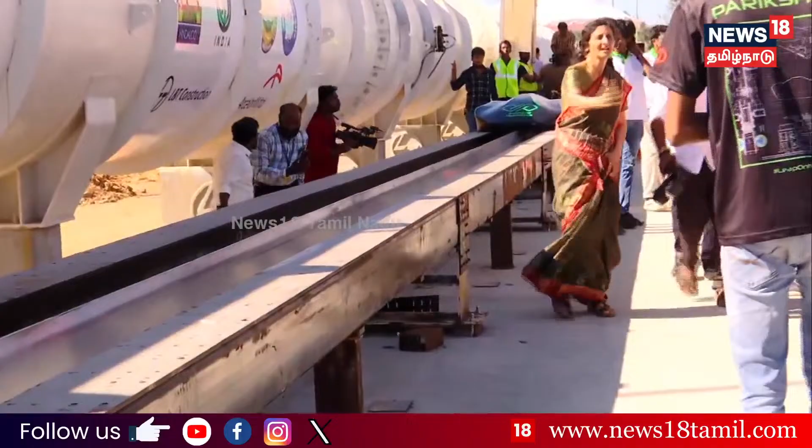Yadav ji, Minister is going to see us.

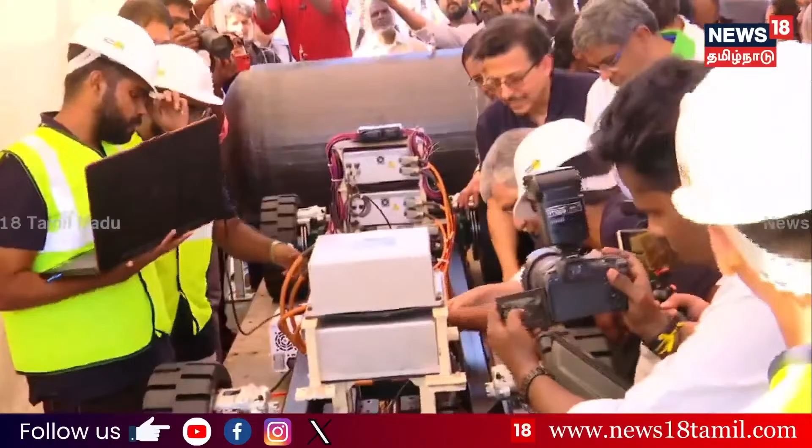So this is the linear induction motor, that is the electromagnet. That is for the vertical. And that is for CO2 removal and O2 generation.

Next is our most efficient propulsion system yet, which uses a yet-to-be-patented technology incorporating two motors into one. Third is the low pressure boiler. For thermal injection we can't use traditional methods since there is a vacuum inside, so we use the low pressure environment present in the tube to inject heat. Last is our integrated power electronics, where we can claim we have created the largest power electronics PCB yet to be made in IIT Madras.

Thank you. Now looking at the long-term goals, having built and designed the 422 meter tube, we realize there is yet more to infrastructure. By reducing the cost, we can further scale up the infrastructure, so we found three ways to do this.

First is air locks, wherein we isolate a section of the tube and pressurize and depressurize only that section. The time required and the energy used is less, hence it reduces the total cost. We have also filed a patent for this.

Second is the material of the tube. Currently we have a steel tube, and we are going to move to a concrete tube, which will further reduce the cost by 81%.

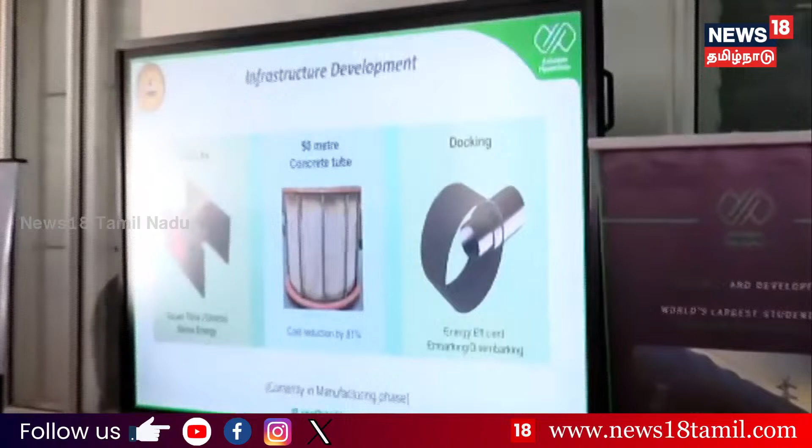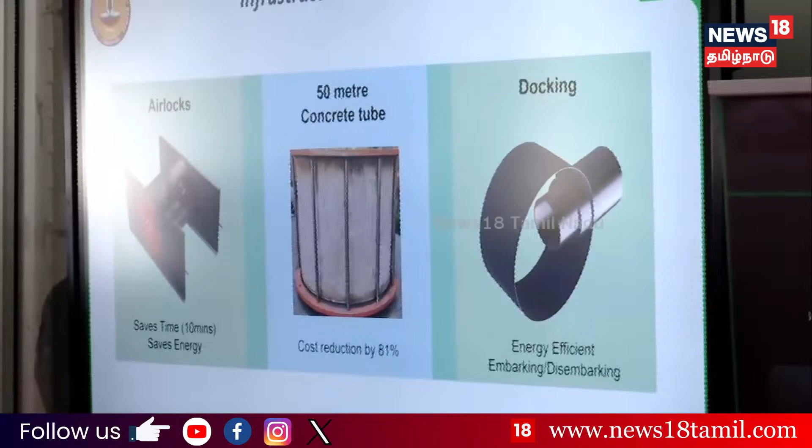Next is docking, which will help us embark and disembark passengers from the pod outside of the station, reducing the energy required and time, making it more energy efficient. One special development we are working on is the real life mock-up cabin, which will help people gain a real life immersive experience of how Hyperloop travel would look like.

We proudly announce that we participated in India's first global Hyperloop competition, GHC, in February, and we demonstrated our pod 6.0. This year we will also be participating in European Hyperloop Week, held in Groningen, where we plan to demonstrate our pod 8.0.

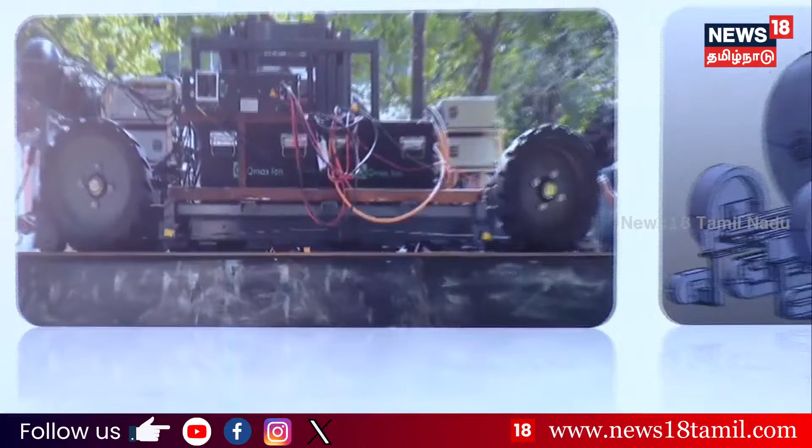We have developed three generations of the pod. In the first generation, we showed linear propulsion, using an Ashok Leyland dost chassis modified for our use case. But we faced a lot of issues when we took other chassis designs for other purposes, so we made a ground-up design and created our own chassis. This is Gen 1, a skateboard chassis which brings the CG down, so during dynamic levitation we will have less load transfer.

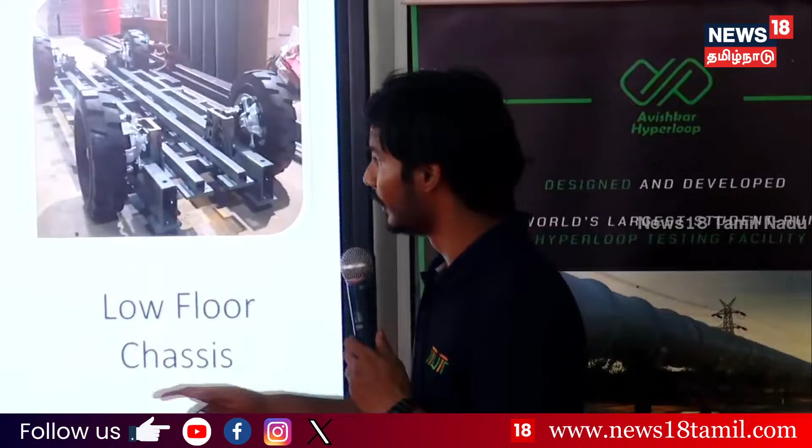We have now made Gen 2 of the pod, which we use for levitation. This will have vacuum operation along with magnetic levitation. All subsystems are designed for full scale, acting as a payload, and we have made it modular so that replacing parts is easy - just remove the bolt and add it from the bottom. We have brought the floor very low so the CG height is very low, and we have a top hat which we use during non-vacuum applications to reduce drag.

We got inspired by the Falcon - Garuda is the Indian name for Falcon, which is why we named the pod Garuda Vahan. We had help from ANSYS in doing simulations and were able to reduce the drag by a good amount. We also took Ashok Leyland's design studio help to come up with the front fascia for our top hat, along with Katya's help in shaping it.

We are currently using steel wheels and solid rubber tires in order to have lesser deflection during full load.

We are now working on a lateral gear, and we are also making the pod compatible for operation in vacuum.

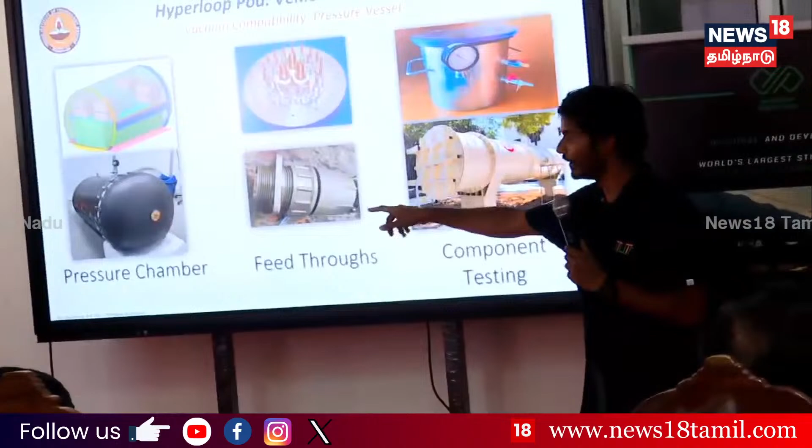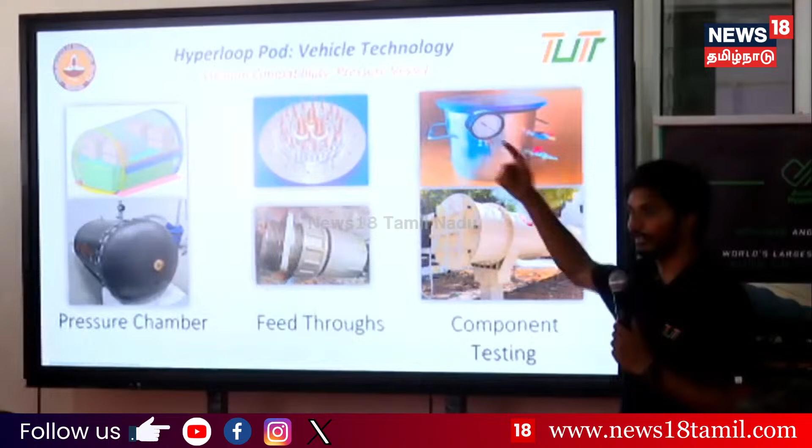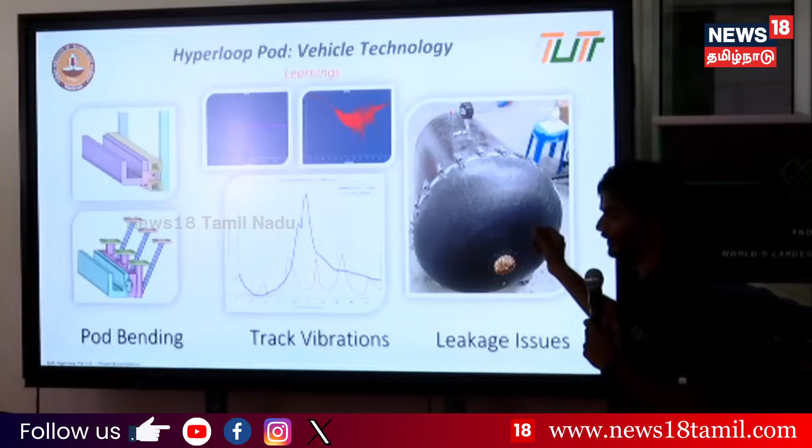So we had a lot of learnings from this journey of more than 2 years. We had track vibrations, so we used the TMD to reduce the track vibration, which was successful in reducing the amplitude, but still it was not up to the level the control system wanted. We are actually finding ways in which we can reduce the amplitude more. And the pressure chamber currently is having small leaks, which we will fix in the next few weeks, and then we will be able to show this operation.

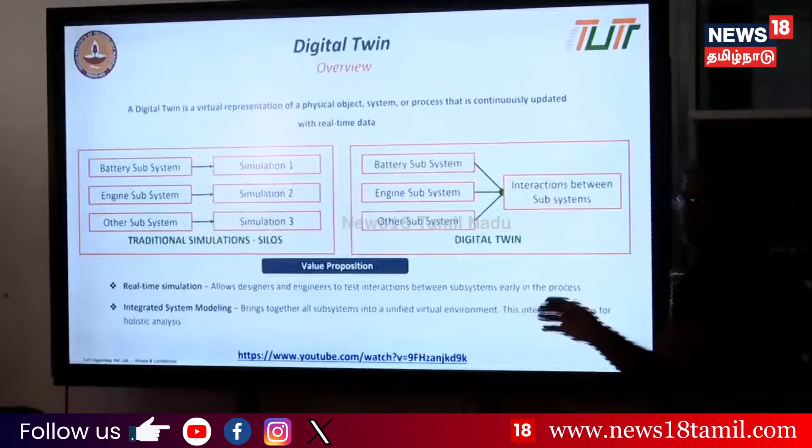As the name indicates, digital twin is a virtual copy of any physical object with all its CAD designs and further all the physical characteristics, parameters, along with the live data feed from all the sensors and components.

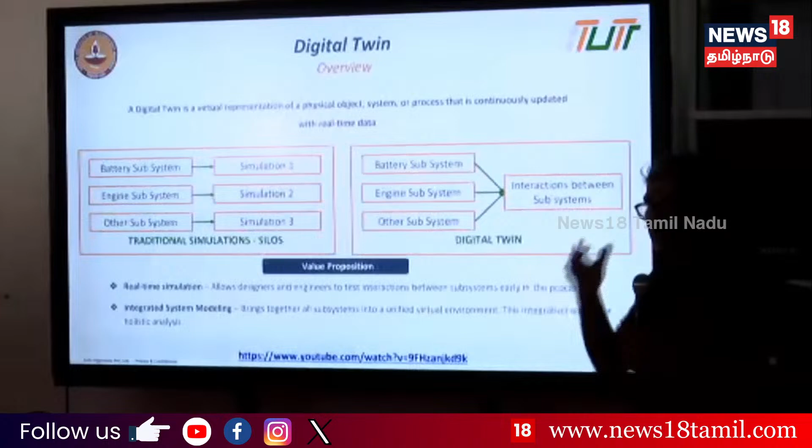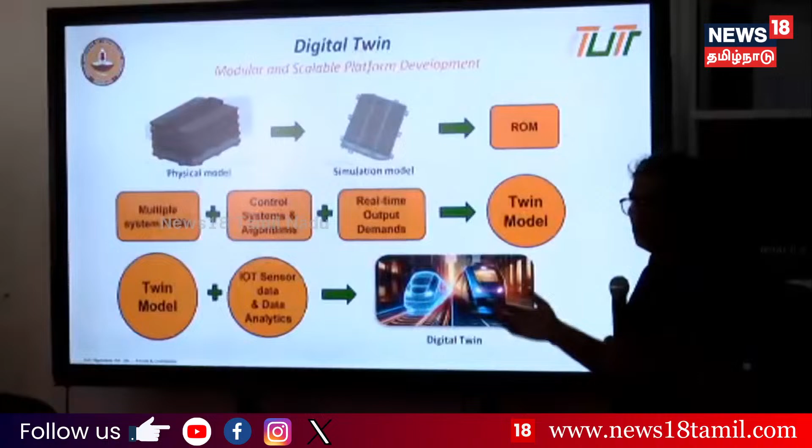Why is this important? Because for any critical infrastructure, important infrastructure like smart buildings or cities and transport operations, using the concept of digital twin, we'll be able to optimize the capacity, optimize the operational cost, improve the safety, improve the customer experience, and lessen the time needed to actually bring out further improved versions of the objects.

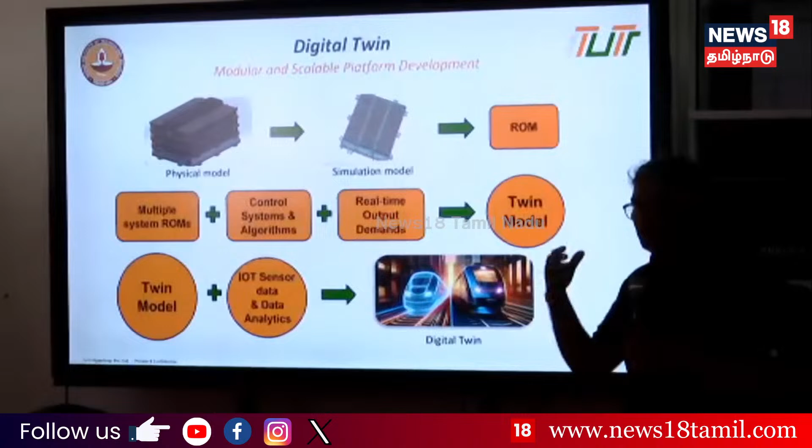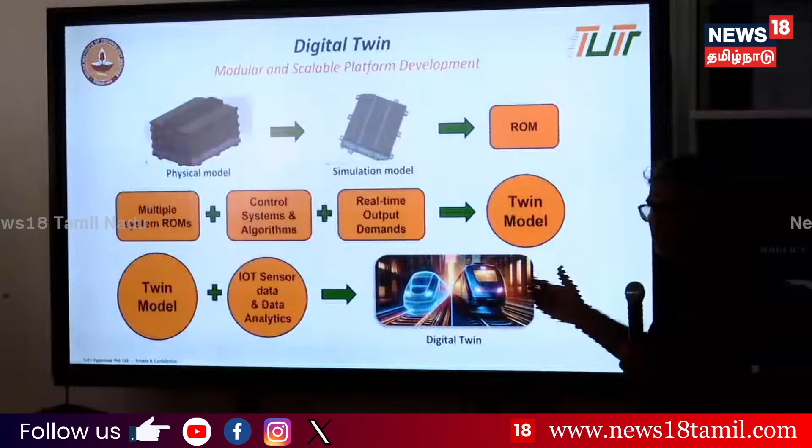So what we have done is we have optimized the core architecture for levitation, linear propulsion, and we have also optimized the architecture for digital twin, so that for any real-world problem that the railways has or any other transport system has, we will deploy only the respective layer of architecture which is needed, depending on the use case.

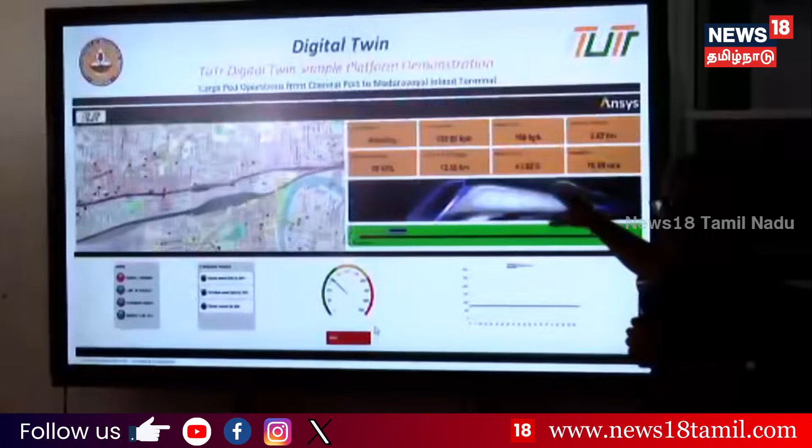We have got some good support from ANSYS, and using their support, we have actually built a mini digital twin application. We have taken a sample cargo port operation from Chennai port to Madhavaram, and we have demonstrated how the port can take cargo and then take it to the inland terminal with various real-time monitoring of these systems. This uses a real-time CAD model and thermal and physical analysis of the battery system that we are using on the pod.

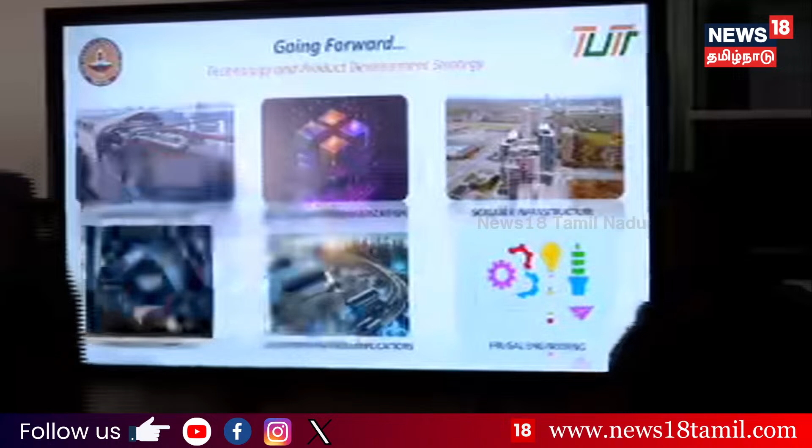Good afternoon, sir. I am a product of Indian Railways, alumni of the founding batch of Gati Shakti Vishwavidyalaya.

Why are we different from others? Everyone's heard Virgin has failed, other Hyperloop companies have failed. What makes us different? Our initial focus is on cargo, an area the government is focusing on a lot. We did technology modularization like our colleagues talked about. We did linear propulsion, maglev and vacuum, which gives us use cases for each scenario within India, including ports and airports. We have scalable infrastructure - like you saw outside the tube, we can use the same infrastructure for linear propulsion, maglev, and the same infrastructure for vacuum. We don't necessarily need the tube for the first two technologies, but once we go above 600, we take the tube.

Now, this is a very unique consortium approach. We thought we don't want to do this alone. We are taking all academia, industry, and government together with us. We have Ansys, Dassault, L&T and Railways. Customer-inspired application - I'll talk about it in the next slide. Frugal engineering is one of the top advantages we have in India. Our aim is to achieve a full stack passenger technology by the end of next year. This is the consortium approach we're planning to take with industry partners, academia and the government.

These are some of the projects we are going to launch soon for the commercial aim. Railway Board, PET sir, has been very supportive in this. By next month we plan to launch the Kolkata Metro and Nilgiri Mountain Railway projects. Container Corporation of India has kindly given us a whole yard to automate and create a digital twin. These are some of the other potential cases we're in discussion with.

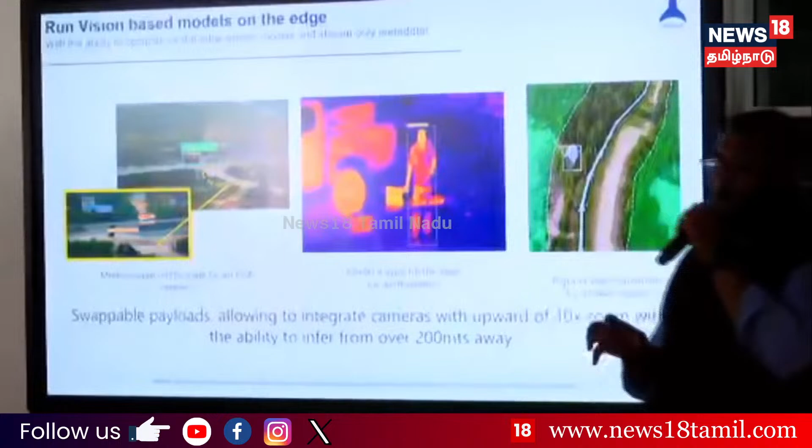I thought you guys spoke about the eVTOL - this is a manned aircraft. Before we actually started designing the aircraft, we built different test vehicles for our own testing - these are what we today call drones. Some of these vehicles we built in the past have a lot of applications built on them to push edge computing to industrial use cases. We were early in looking at combining RGB plus IR streams and pushing analytics to the edge. Industrial use cases were for inspection and surveillance, and we want to bring this capability to the railways.

We worked with RDSO and the Southern Railway headquarters to come up with about 9 use cases. These are the 9 use cases we picked specifically for overhead equipment inspection - we're looking at the traction lines for these specific cases. I'll talk about them in more detail in the next segment.

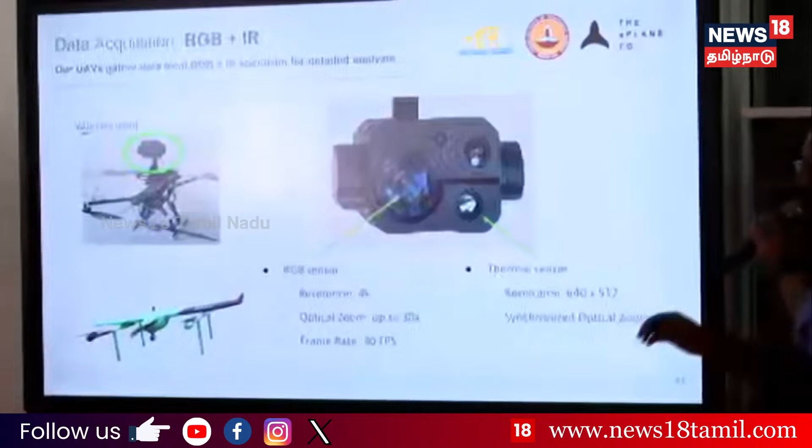We are now using a small vehicle called a multi-copter to do data acquisition, but we will move to a bigger aircraft - this is a fixed wing hybrid, which you will see a demo of outside when we leave. The camera packed in this has a dual sensor, meaning we do thermal imaging alongside it.

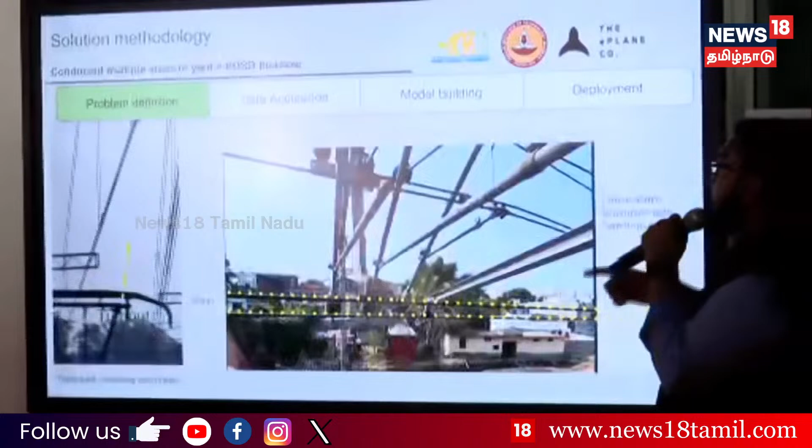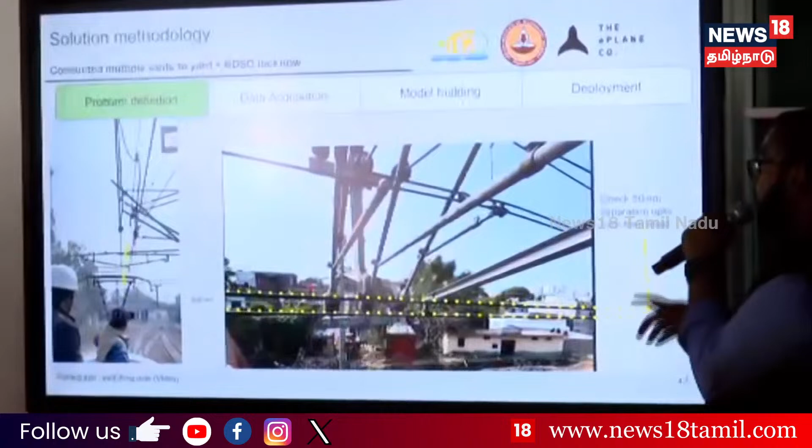We spent a lot of time with RDSO in Lucknow, and we started doing a lot of data acquisition, continuing to spend time there. This is an actual OHE inspection car I was part of, where we looked at how maintenance happens today, and how we can use a drone to automate the whole process.

There are other use cases too, so we started collecting samples from cantilever health, missing number plates, dropper issues, etc. This is an image of our drone flying at the Egmore yard here. Thanks to Southern Railways for allowing us to do this. You can see a video where the locomotive is moving and we're looking at a turnout.

Turnout inspection is critical because you have 2 wires coming on top and the gap between them is 50mm, so you need to continue maintaining that 50mm gap. That's what we're trying to do. That video was from the drone itself.

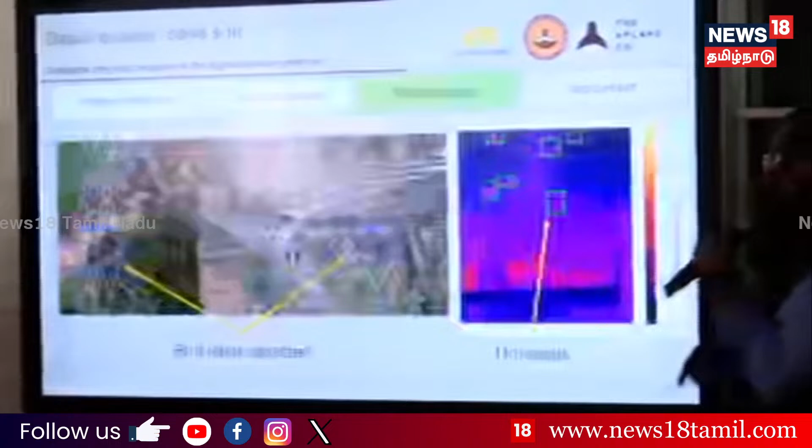This is a sample of the model we've done. We've already started being able to detect burrs on top of the mast, and we also started looking for the temperature rise in the OHE components. These are 2 models that are built.